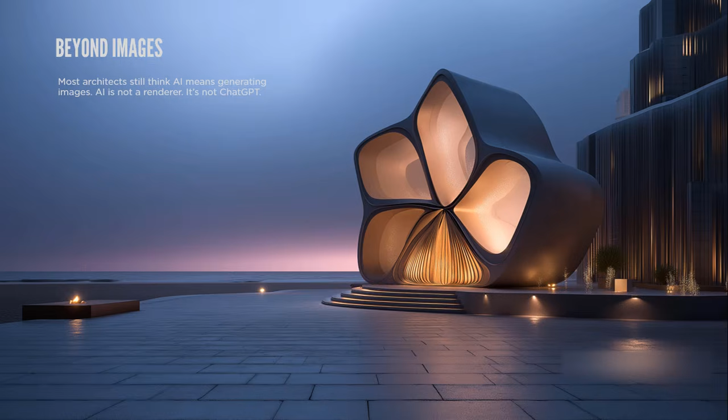And we will see how we can translate natural language inputs and feed them into tools like Grasshopper, transforming them into either parametric or generative models. The main aim is to shape new design generation workflow.

AI, here, we can use the artificial intelligence to increase the creativity and precision, and also to reduce the time of the design process.

I think the video is not working, right? Okay, it's fine.

So currently, when most people hear about artificial intelligence in architecture, their minds immediately turn to ChatGPT, large language models, Midjourney, diffusion models. However, we can use it more beyond this.

We can use it deeper than these tools, and we'll see how AI could help us in the design process. Now we are engaging in a comprehensive dialogue with a machine that can learn and

understand, analyze, and provide highly informed answers. Therefore, our task is to discover the maximum potential of artificial intelligence to truly assist and elevate our design process.

It's important to understand that artificial intelligence is not set to replace our creativity, as it's said, but it will change how we perceive things and how we translate information into code that will help in building the architecture that will exist on the ground.

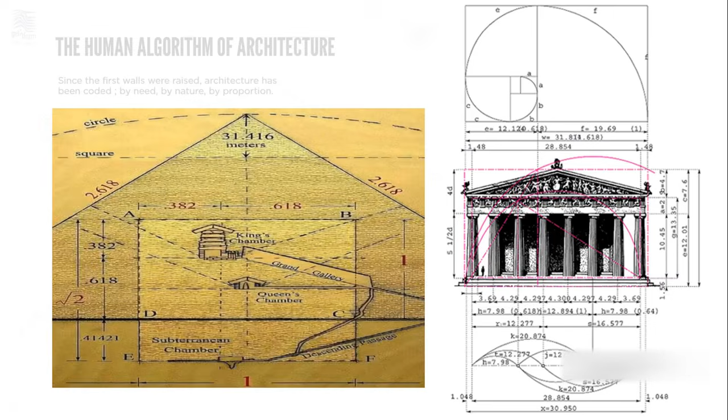Let's see what is the foundation origin of AI. It is the algorithm. An algorithm has existed for a long time, dating back from the ancient civilizations. For example, the construction of the pyramid,

the construction of the pyramid, which are built on proportions and mathematics that interpret the cosmic orbits in geometry. And the same we can see in the Greek civilization as well, when they used the golden ratio in building, like in the Parthenon. So architecture was coded by the need and the nature and the proportion.

We translate the needs, design guidelines, context, and architecture proportions into a code, a set of rules that guides constructions. This original methodology is a form of a human algorithm.

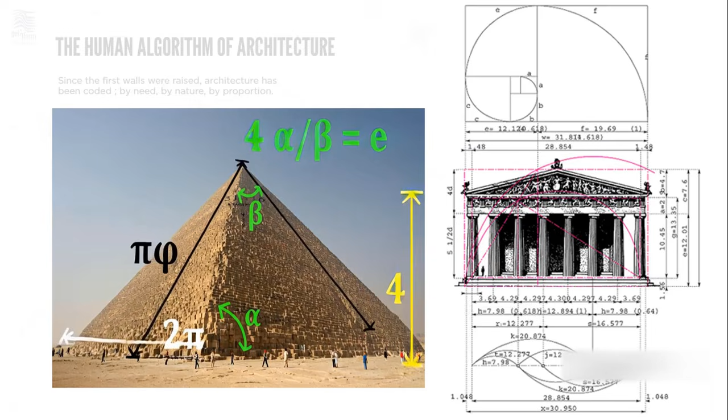It's a set of rules, again, used to achieve a desired outcome, incorporating factors like heat, light, gravity, and social needs, which are all translated into rules and patterns. Therefore, AI is not replacing human logic. It will help us more to discover what the human logic is.

The word algorithm itself derives from Al-Khwarizmi, who is considered the father of the algorithm, because he was the first to formalize steps for solving inheritance equations, as well as determining the angle of Qibla toward Mecca. That was basically considered the origin of computation and the AI we see today.

Next, there is an important source of algorithmic design: Christopher Alexander. His book, A Pattern Language, translated natural life patterns into mathematics and algorithms. He described the network of decisions where every door, every window, every tree or every corner, every street, everything has to follow a specific rule, leading to the realization that life is a large system of relationship.

Each pattern was like a small piece of code capturing both logic and feeling. We can simply say that a recipe is a kind of steps that could achieve the recipe at the end. So algorithm is a set of rules that we follow.

This brings us to parametric design. Parametric design is different from algorithmic design, and it means establishing relationships between parts based on a defined set of rules or algorithms. Like Alexander says in his pattern language book, it's about building a system and defining part-to-part systems, and also the relationship between the part to the whole systems.

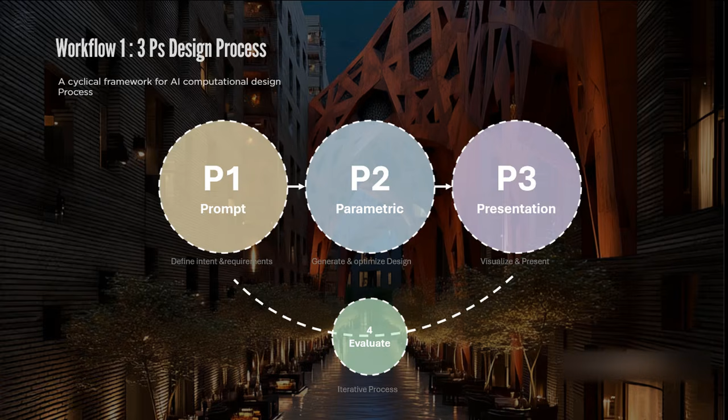Then I started to integrate AI models, the LLM models, inside Grasshopper to save time switching between the web browser and Grasshopper. So I inserted it inside Grasshopper itself. I started with asking it some text-to-text questions, then I turned this text into code.

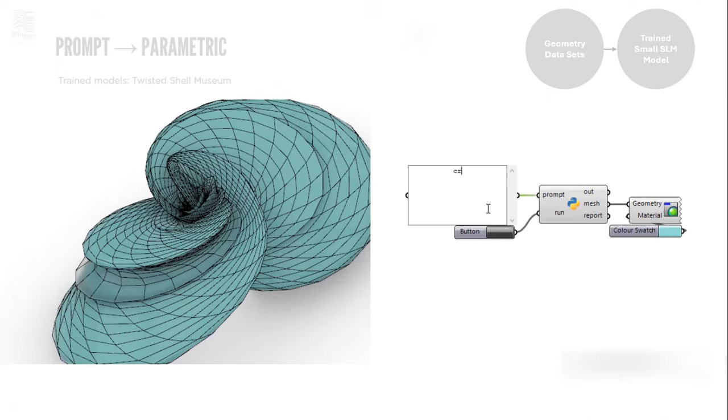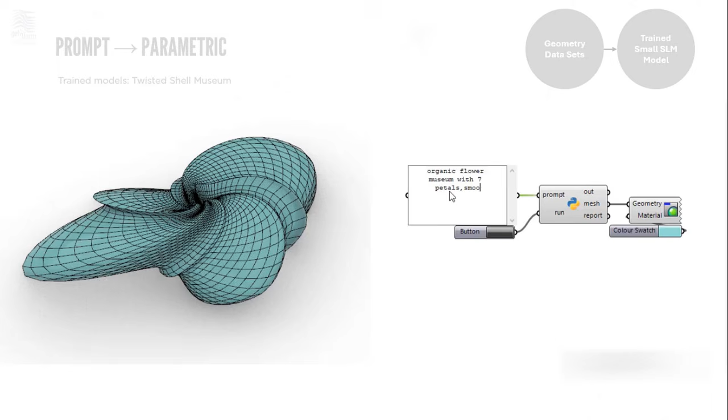For example, I wrote a concept description such as a twisted shell museum. Now AI has the capability to convert the natural language I said - for example, a twisted shell museum - and get the nearest example, like a geometrical form, to what I defined. The AI then analyzes the description, identifies the closest existing geometry, and generates the corresponding code for it. Then I added different prompts like parameters or variables with constraints, minimum and maximum values, to give it more variation or get more results.

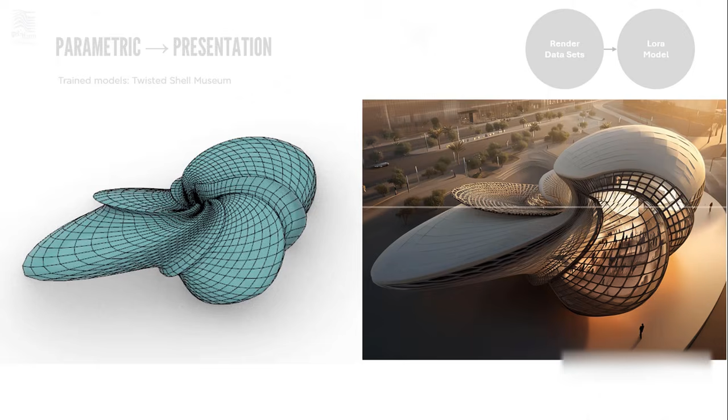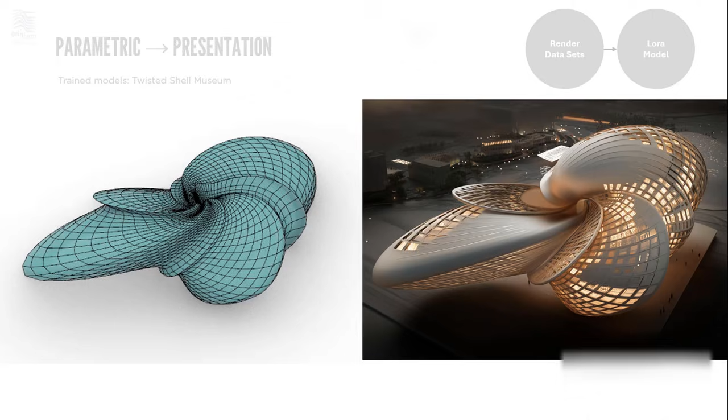Then the results, when we agree on the final form, undergo some AI renders - I think it's mostly used now, the AI render in Midjourney or alternatives like LookX or mnml.ai. And then with the resulting 3D, we use this render to test different materials or details to save time seeing what we're designing at the concept phase with the client.

And now I'm working on training an AI model to gather some specific mathematical shapes and datasets, to help the model understand the geometric translation of natural language. This is a small example - we couldn't call it a large language model, it's called a small language model because it's very specific for a certain function. We focus on converting text to geometry through Python.

Also, there is another example for this workflow. It could help us in urban planning as well.

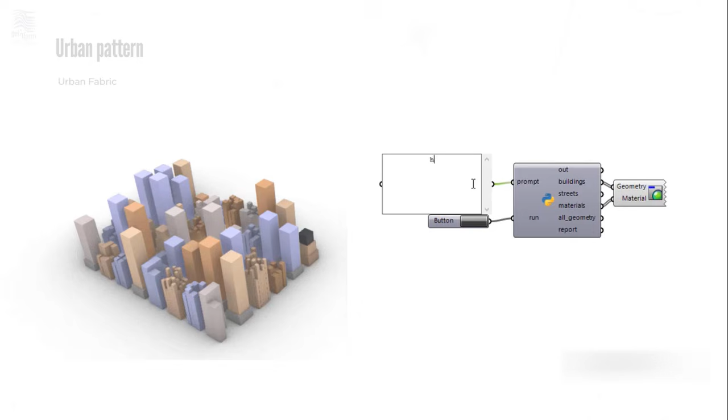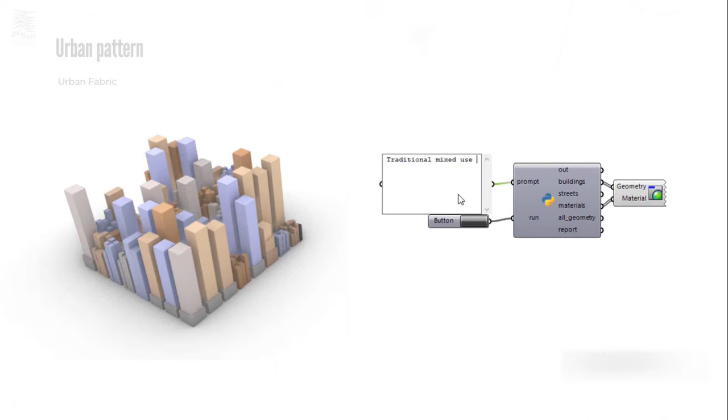I asked the AI to generate a city shape or urban fabric with specific requirements: different shapes, varying heights, and distinct properties for each building. Then the code is generated, and by refining the prompt, the model can be iterated multiple times and give many variations. So I could say traditional mixed use or historical district with different heights, and it can identify the heights as well, maybe the number of floors.

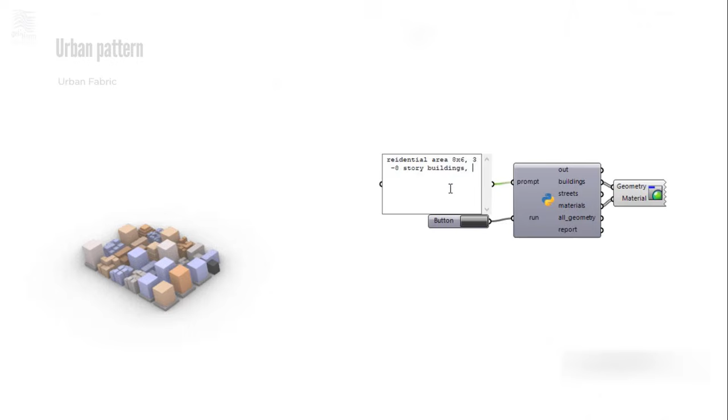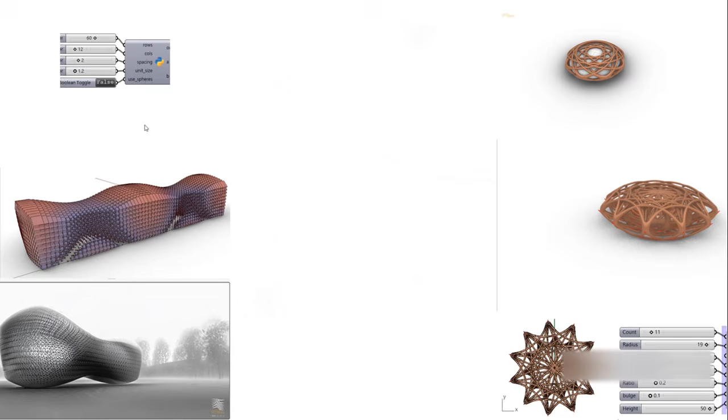All of this is a small language model with a specific function. These were some further examples. I made it, I think, in the beginning of experimenting with this option, and it showcased different applications of the AI-aided design process in the conceptual phase. Here are some more examples as well.

Next we can talk about the second workflow, which is image-to-parametric, and this is the latest one we have tested so far. It's image based: we upload the image to the parametric model or to the LLM model, and then it returns back with the code that interprets this image.

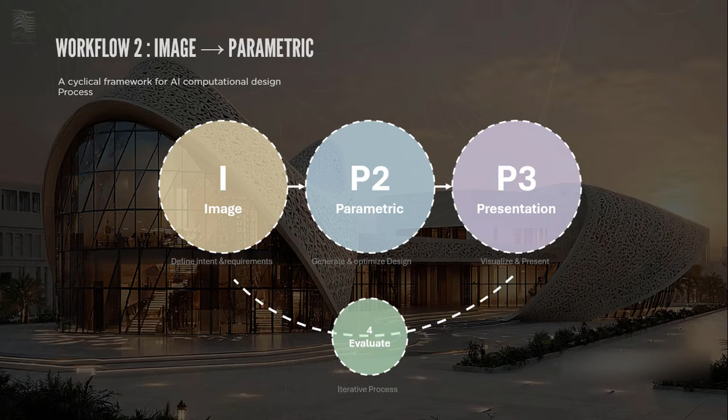This workflow was very surprising for us because it shows that AI has very good computer vision. Now it can interpret images not by the colors or the pixels, but by the objects that it contains. For example, I didn't say that this image is about the Chrysler Building. I just sent the photo to the LLM model, and then it directly converted it into a parametric model, not just a code, but a parametric model.

There are some plugins in Grasshopper now doing this part, image to normal Grasshopper nodes and relationships, but this converts the image directly to a parametric model through Python. So all of this shape is described inside the node as Python code. It was very surprising for us. Instead of generating a static 3D model, the system generates a script, and the script contains variables that allow us to control and manipulate the resulting geometry, giving also some interesting variations.

There is another example here from our student Fatima. She did the same process but with different shapes and different applications, and it translated very, very well. We can see that it doesn't look exactly like the image, but it's very close to the nearest geometrical form of what was sent.

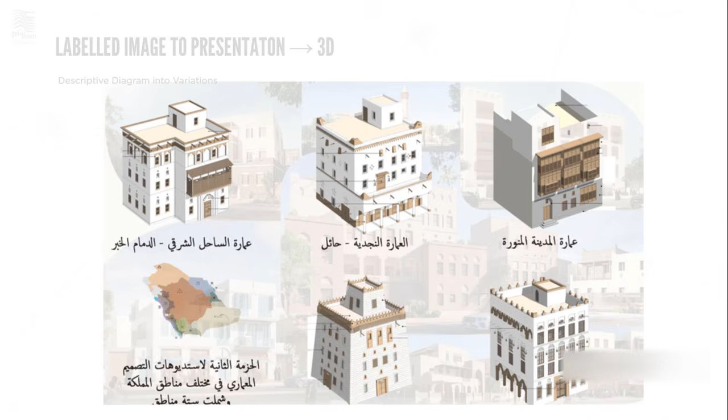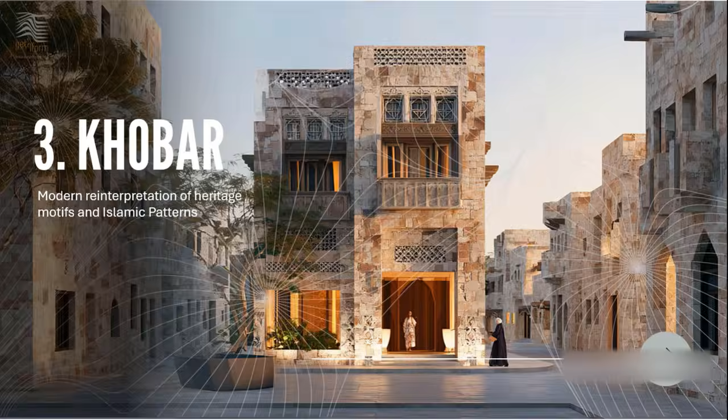The next workflow is diagram-to-3D, and it deals with images that contain labels, details, and specific vocabulary. I tested it on Saudi cities' codes. I used diagrams published by the Development Authority Support System, which outline specific features, vocabulary, proportions of the cities, and overall the forms required to maintain the identity of the city itself. So I fed in the diagram and wrote all the details about each city, its identity, its features, and its vocabulary, and then converted this image directly into 3D models.

This was first: the concepts are generated by Midjourney for each city.

Then I tried to take each design and convert it into a 3D mesh. This was a trial, so there's an option to add texture to this 3D model, but I had a problem that it didn't complete this step. So we can also use textures. This part helps with the conversion from the image to 3D.

Now it's very advanced because we can see the internal spaces as well, not just the external spaces. It can deduce all 6 views, or 4 views, for any image. I just started with one image and it deduced all the other views, and that was a reward for us, because it saves like 10 times the normal rendering process to convert the concept into a 3D model.

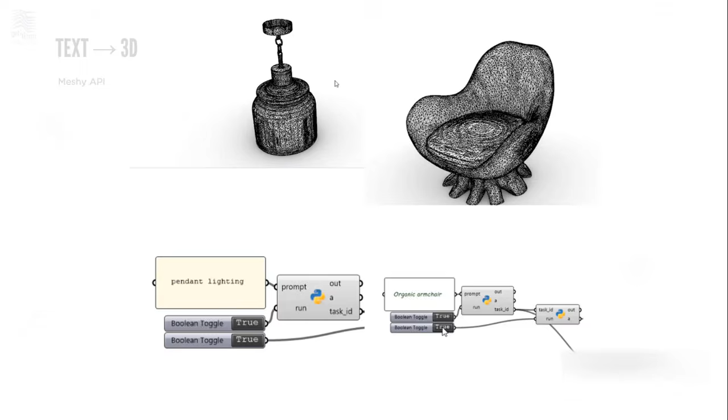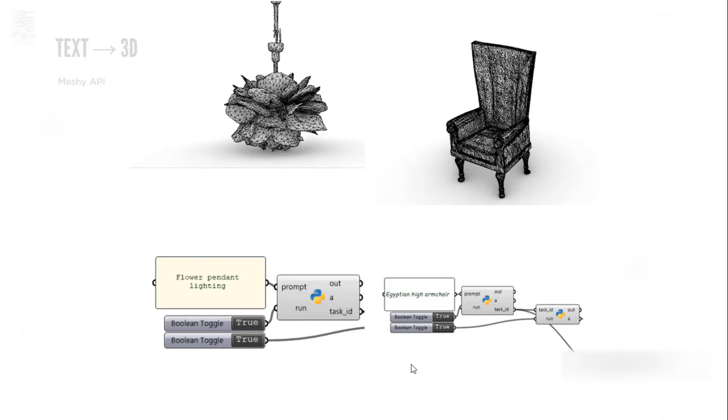We can test on it, we can 3D print it, and test the heights, the forms, and the vocabulary like mashrabiyya, to see how it fits in the place. So as a start, it's a very good option.

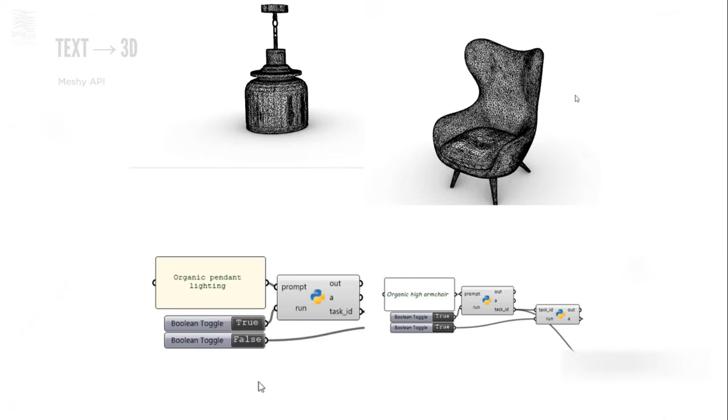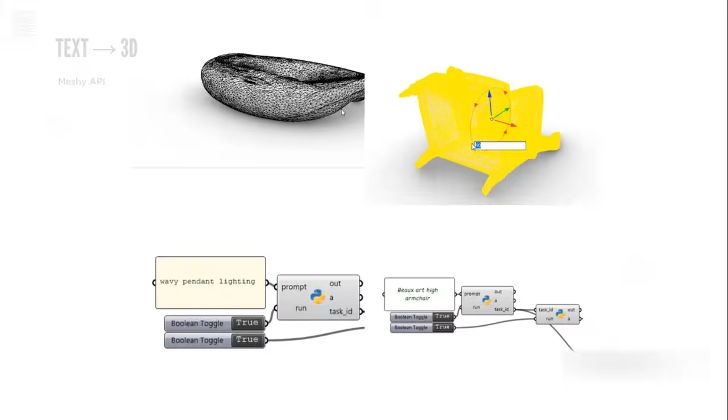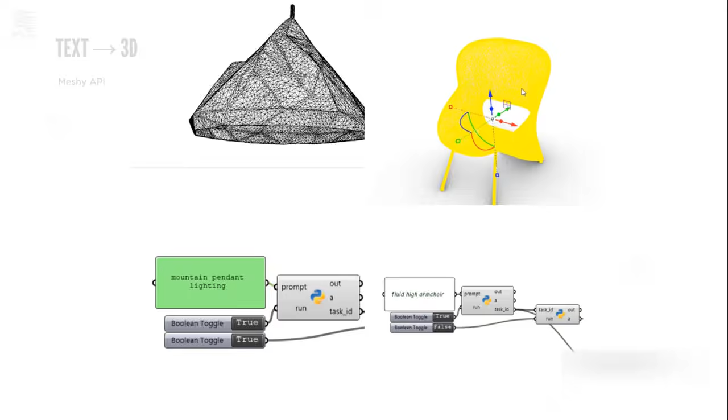I have also experimented with text-to-3D inside Grasshopper by using the APIs of these AI models. For example, I asked it to generate an Islamic chair or a wavy lamp, and it could blend the concept very well and create the point cloud of each mesh perfectly. It's getting more advanced day by day.

The next workflow, and the most important one, is prompt-to-generative design. This is where the AI, after the algorithm builds the rules and parameters, begins to propose solutions and options based on its analysis and predictions. The AI performs an evaluation of performance, and the output is a set of outcomes or results or options. We then evaluate each one, revise the rule again, and regenerate. So here it's prompt to parametric and generative.

To differentiate between two things: what is the difference between the automatic machine and the automatic algorithm? The automatic machine, like the washing machine, has an algorithm, but it's fixed and pre-programmed. For example, wash for 10 minutes, then rinse for 5 minutes, then spin. It's a set algorithm to perform its function. There is no adaptability, it's only rule-based and repeats this process.

But the automatic algorithm, like in artificial intelligence self-driving cars, it's a dynamic set of rules using machine learning to learn and adapt. It can identify the best route to follow with its experience, customize itself without human interference, and learn from its errors if an outcome doesn't meet the necessary pre-coded conditions. So the AI restarts the process and learns from the failure to avoid repeating it again, and this technique is called reinforcement learning.

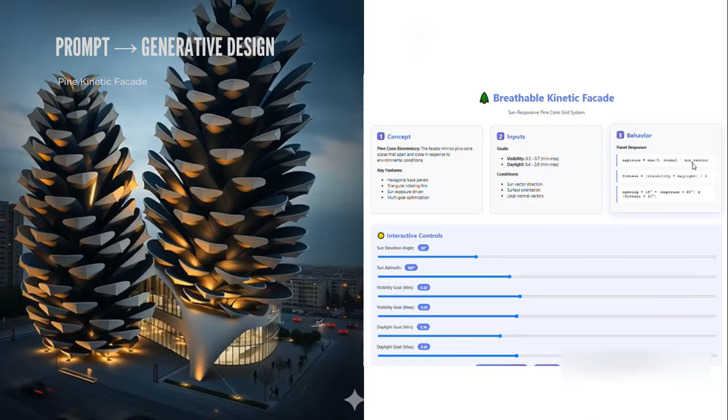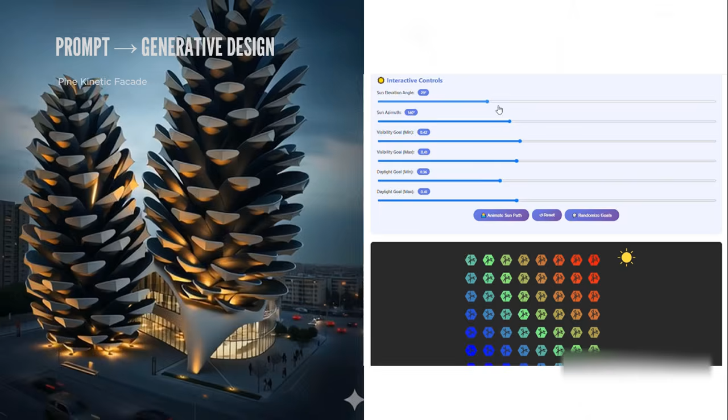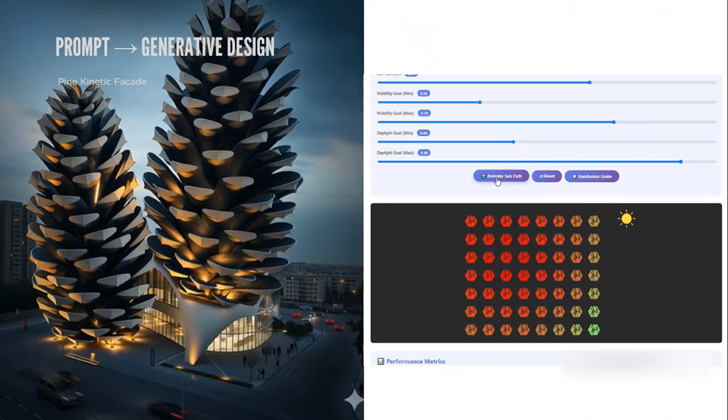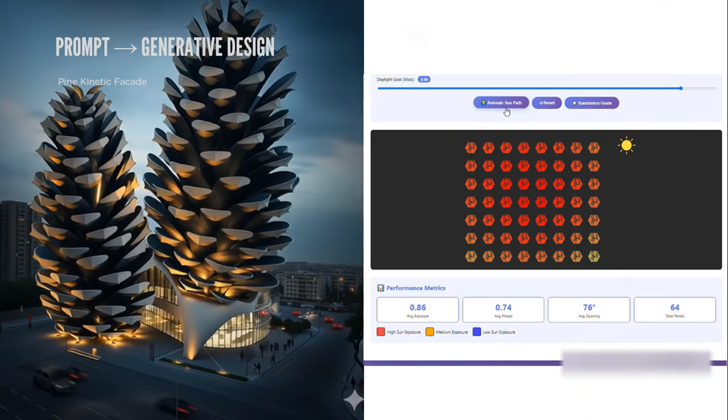Then I tried a simple example from a pine-inspired facade, taking inspiration from nature, such as pine structures. I tried to generate a responsive or kinetic facade. The goal was to achieve maximum or minimum solar gain - two conditions. Then, using the sun's movement, the rules are defined by parameters. Here's a preview showing how it works when I animate the sliders. The sliders start to find the best or optimized solution for the condition or goal I set at the beginning.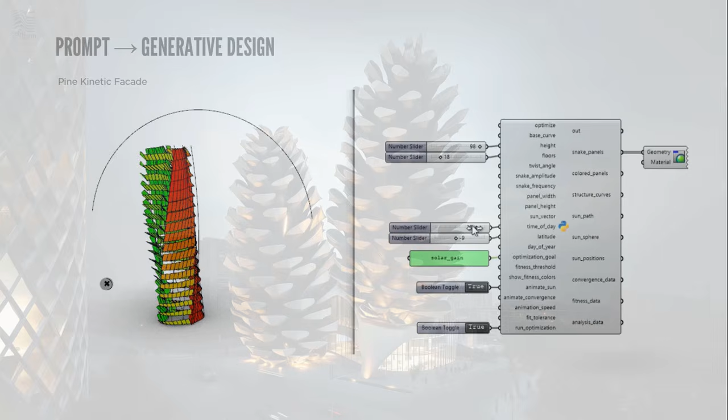Here the system calculates the optimal inclination angle for the facade panels, ensuring they are responsive to the sun's movement. So we can see when the sun moves, the panels move, opening and closing, and we can fix the design for a certain variation, stopping at a certain point to say this is the best variation for solar gain or solar loss. All of this happens internally in this Python node.

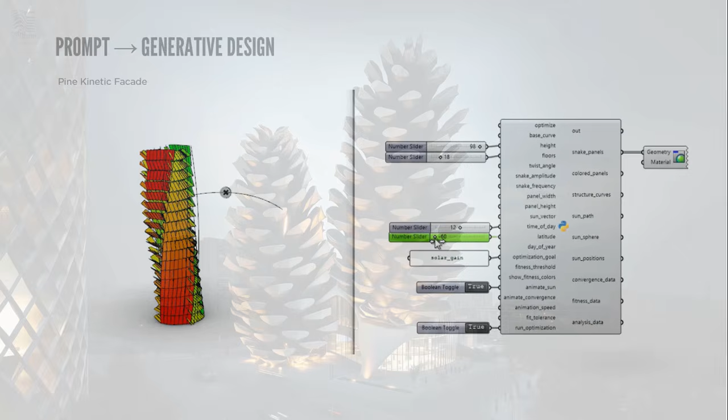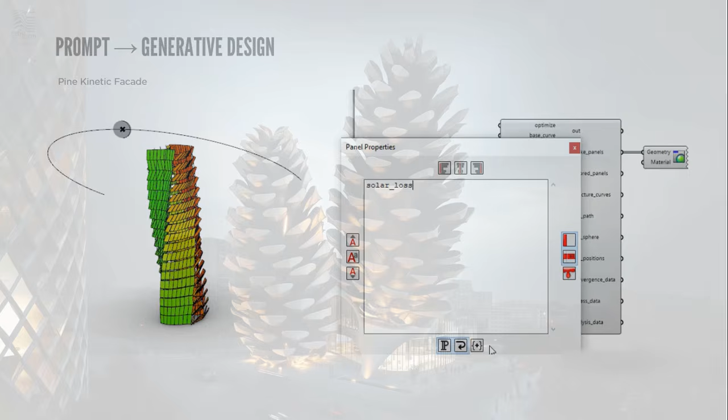We can also use this concept for a kinetic building with sensors. The sensors could be attached to the panels themselves, and in real time the sensors could react with the sun, opening and closing according to the sun's intensity.

The second example is the armadillo skin concept. It might help for some hot cities. So I modify the extrusion of these facade panels based on the sun's path to achieve maximum self-shading at midday or during summer. The AI runs the calculations, provides the optimized model that achieves that self-shading condition, and then classifies the facade distribution, calculating everything else like the number of panels and the angles of each panel.

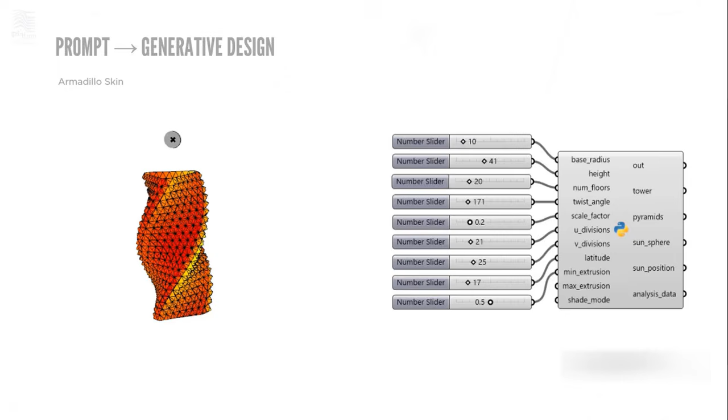This example could also be applied to classifying facades in urban blocks like this one. We can classify the panels - which is solid, which is void, and which is sunshade - based on the sun path or sun direction. So it could classify which will be glass, which will be solid, and which will need to use sunshade.

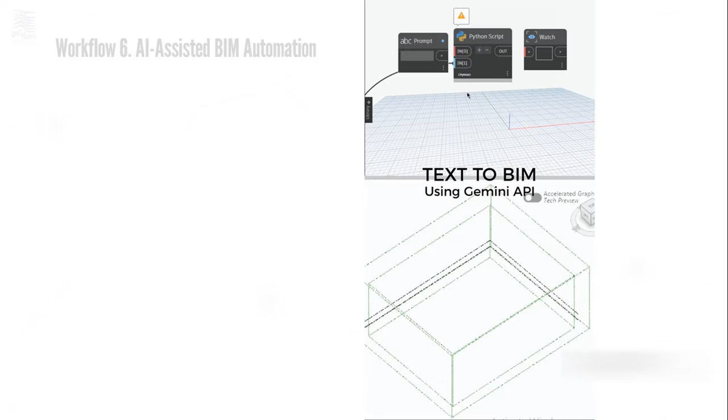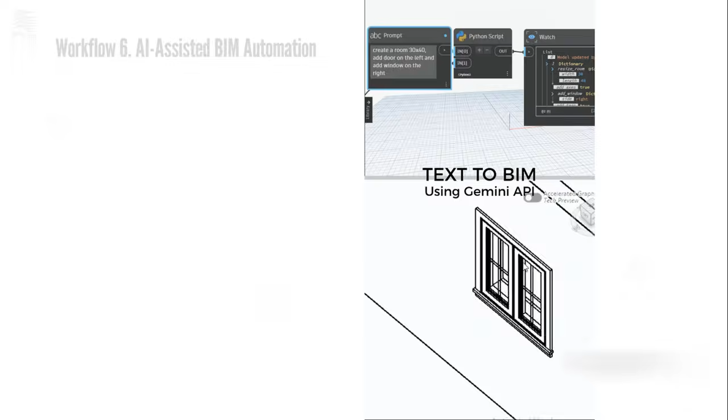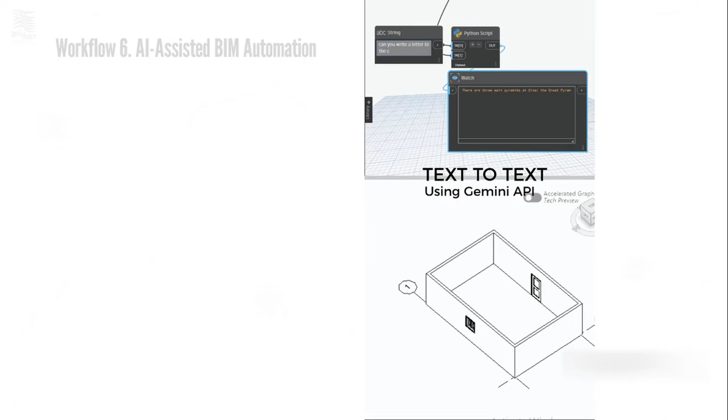The last workflow, still a work in progress, is trying to use a large language model in BIM so that by natural language you can say: place the window facing north or south, or distribute furniture based on maximum daylighting, or distribute spaces in a building or apartments. These efforts focus on distributing things according to natural language. It passes through many steps to get the geometry done inside Revit. I used Dynamo here to achieve this function.

So finally, this was a rapid overview of how architects can use AI in their daily work, and how we use it at Getinform. By training the machine to assist us in our core process, we can save significant time and achieve the highest level of efficiency in our designs. Thank you so much.